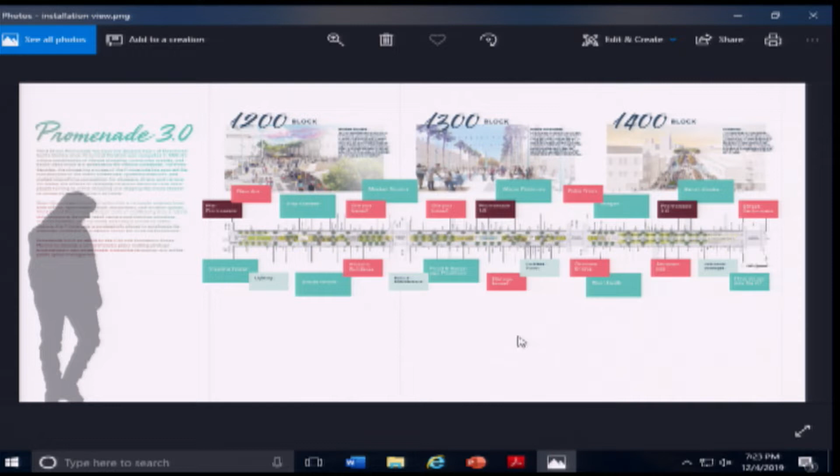I also want to share the latest that we presented to City Council. As I mentioned, on November 5th we had a long study session with the City Council on Promenade 3.0. We dived into all three lanes of activities. As the commission will recall, we've divided our work on Promenade into three lanes. Lane 1 deals with management of the public space and the role DTSM plays in choreographing and curating events on the promenade. Lane 2 deals with some of the regulatory, mostly land use regulations on the promenade.

And you'll recall, before November, in October, you had a study session about a potential IZO related to promenade fronting properties, so we're still working on that. That's lane 2. Lane 3 is the actual physical plan for the public infrastructure of the street. So the presentation I have tonight is just on the physical plan, because that's new material we presented to council that you haven't seen.

Council's reaction on all three lanes was very positive. They said, go forth and be bold. They really didn't pull back on any of the suggestions we made, which in the case of the physical plan, you'll see results in a pretty significant transformation of the street.

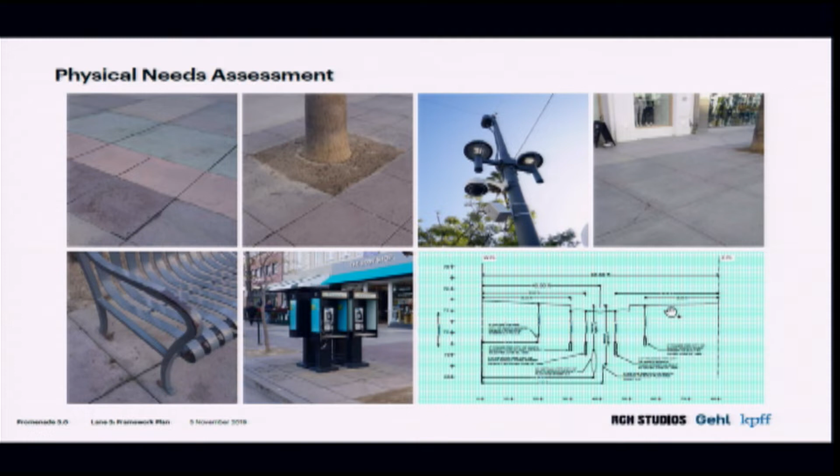I'm not going to go through a lot of this preamble material, it's the same presentation we gave the City Council. So you recall there's a project vision, and there are 7 project goals that flow out of that. You'll recall we started this process a year ago with a physical assessment of the street, counting every crack in the sidewalk and mismatched pavers, and there's still phone booths out there. There's some pipes under the street that probably need to be repaired.

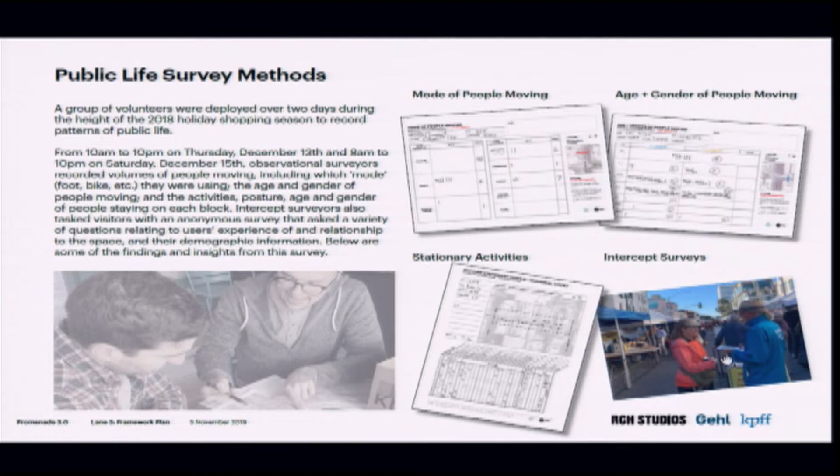We did the pretty extensive public life survey. We spent 2 full days last December, almost a year ago this week, surveying people through interviews and also just recording their behavior as they stood on the street or walked by. We came away with a series of pretty interesting insights. We did a study session in March, I believe, with you, where we reviewed all that material.

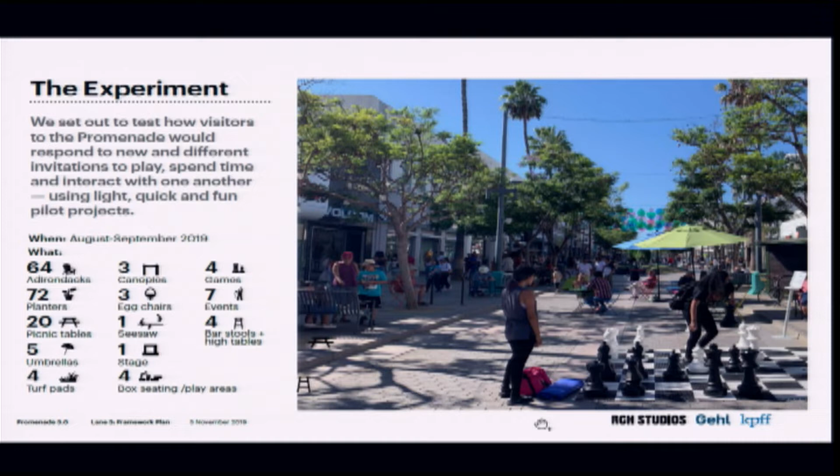There were 5 insights that we thought we could test through summer pilot projects, and I hope you had a chance in August and September to walk the promenade and see some of the activities we put out on the street. There's just an inventory of chairs and a stage, etc., that was put out on the street that we called the experiment, and the response on this was overwhelmingly positive.

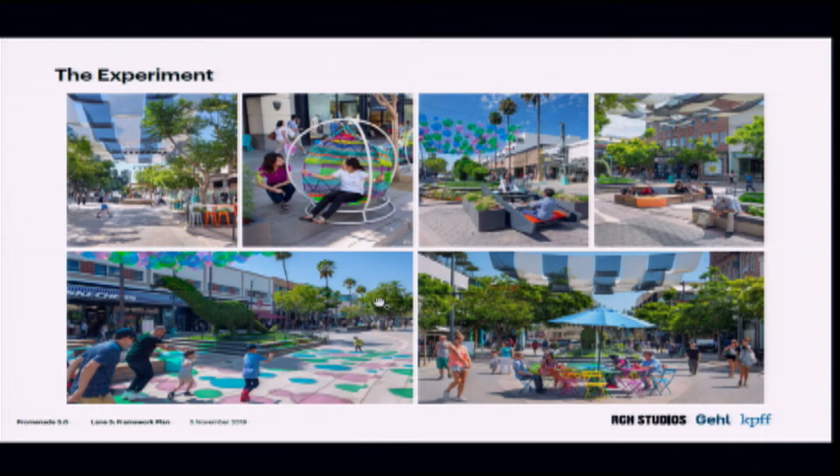Some of the takeaways: we increased, based on another survey we did in September, where we repeated the same public life survey. We increased the number of women and children as an overall percentage of people spending time on the promenade, particularly in that center play space. So that's a good trend direction.

Businesses reported an increase in foot traffic and in some cases sales during the time frame of the experiment, and we don't think there was any other significant factor, like no new major stores opened in that time frame, that would explain increased foot traffic other than the new amenities we put out onto the street.

This one, I think anyone who's studied William Whyte isn't surprised by at all: when you almost triple the number of public seats available on the promenade, you see a huge increase in the number of people actually sitting and using it. Last December there were only 90 public seats, and less than 1 in 100 people recorded walking up and down the promenade actually sat down. With almost 250 seats, 1 in 11 people were recorded sitting down.

The seats are all movable, and the funny anecdotal takeaway is that we'd arrange the colorful Adirondack chairs in the same pattern every morning - the downtown ambassadors would do that - and on the 1400 block, by the end of the day, most of them had migrated to be in front of the Apple store as a kind of outdoor waiting room. So movable furniture was a big hit, letting people create their own social spaces. The ultimate design relies heavily on movable furniture, as you'll see.

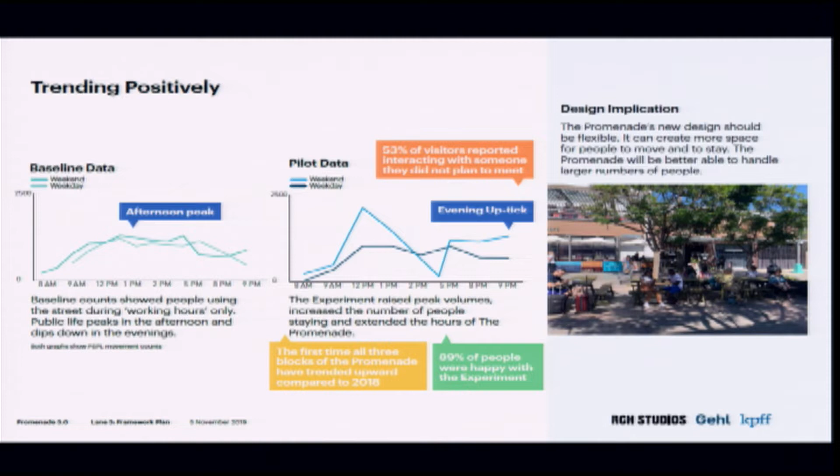But another interesting fact we learned: we thought we wanted a stage at the end of the street - the far north end being the attraction to bring people to walk all 3 blocks. Even though programming on that stage was relatively light, we got some noise complaints from people who live in the neighborhoods north of Wilshire about activities occurring there. So as we worked through the design, we realized the primary stage probably needed to be in the 1300 block. This is a case of designing, testing, and learning as we did this experiment over the summer.

Here's an event we did on the stage. We were on KCRW - Frances Anderton spent some time with us.

We did a number of workshops with property owners and focus groups, to establish guardrails - as long as we had a design that lived within certain parameters, they'd be willing to support it. If we wandered outside those guardrails, they'd be challenged in their ability to support the project. So that's really what we were trying to get from the property owners.

That informed the direction we took across 3 scenarios. Our design team at Rios Clementi Hale Studios and KPFF Engineering identified 3 approaches: improve, adapt, and transform. Think of these as small, medium, and large in terms of impact to the street - the amount of change it would see, and of course the price tag. Improve is somewhere in the $10 to $20 million range, whereas the full transformation pushes over $50 million.

In the end, after talking to property owners, they told us they'd really like to see what the full transformation would look like and what it would accomplish for them.

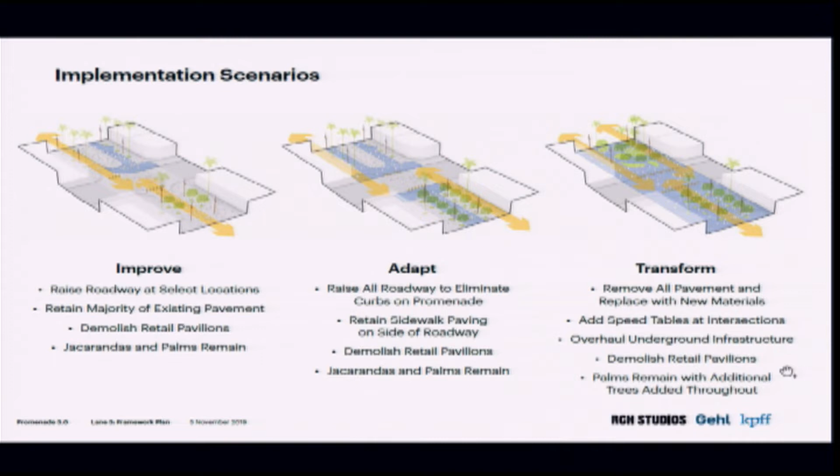So all of that added up to property owners thinking that they really wanted to entertain the transformation scenario. And so, as I said, that was the direction we gave to RIOS to pursue. So I'll walk you quickly through the core ideas of the RIOS design.

There's this basic diagram. You can see the three blocks. So Wilshire is over here on the left, Broadway and Santa Monica Place is on the right. They've given the three different blocks these different programmatic identities, as you can read there. The colors will correspond as we move through to different kinds of program experiences.

So each one of the blocks has a space, and in some cases maybe two, where we can do different kinds of events. These are either built-in stages or spaces that can be utilized as stages for different kinds of program events.

One of the things that DTSM in particular would like to see is one of these event spaces, probably the one at the 1300 block, be basically plug and play, ready to go. So if you've been out there for a major event, you see wires and generators all over the place to run the speakers and the lighting. So part of the underground infrastructure would also include providing all that event infrastructure pre-wired into one of these event spaces, probably in the 1300 block.

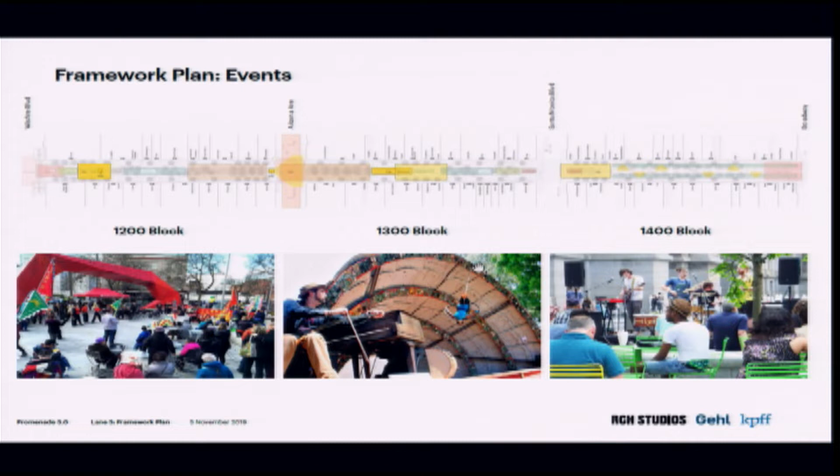One of the ideas we were testing over the summer was what we called social eddies. This is the idea that there are spaces on the street that allow you to get out of the flow of pedestrians. There are days when there are so many people moving up and down the promenade that it's actually hard to stop, you sort of feel like a salmon in a river. So we were testing the idea that maybe we could create spaces that were smaller, intimate, where people could stop and sit in the middle of the street, get out of the flow, and just enjoy the theater of the street itself.

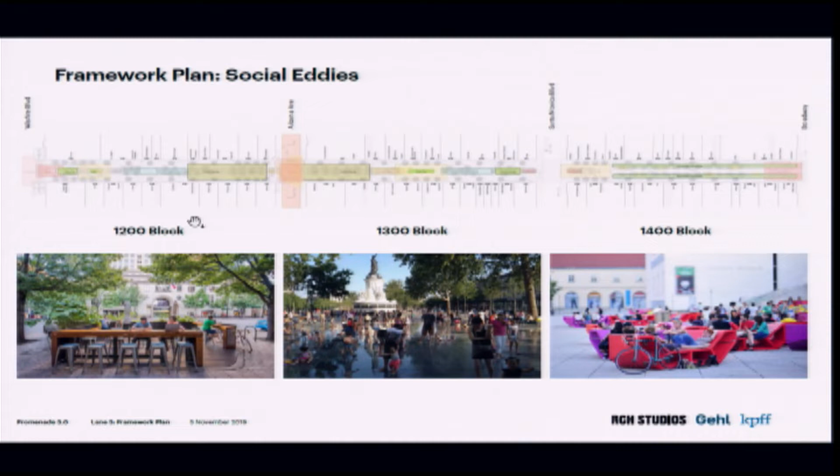There are various places designed in the plan for these kinds of experiences. One of the big ideas is to consolidate the farmers market at Arizona and 3rd. We'd lean into the fact that we close Arizona for the farmers market, but what we're designing for and proposing is that the portion of the farmers market that closes 2nd Street would actually move up onto the promenade itself. You can see trailing north and south from Arizona, we're providing market space, and you'll see how that looks in the detailed plans momentarily.

This is both the Wednesday and Saturday farmers market, but we're also imagining this could be any kind of market that utilizes this standard 10 by 10 tent, and in some cases maybe a smaller market that doesn't need to close Arizona. That could be a monthly used book fair, pet adoption, a flower market, particularly with the holiday season, a Christmas market or holiday market, craft market would be very appealing. So there's lots of different ideas for that. It could also be other kinds of community festivals, like a Korean food festival or different Korean food vendors that utilize the tents to do a food festival of some kind.

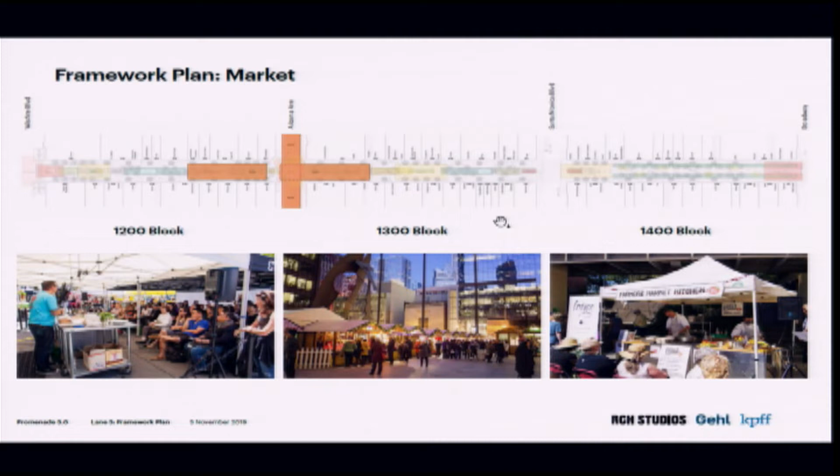We're also identifying locations where significant public art could be located, and they're generally falling, as you can see, at the intersections of the east-west boulevards. These could be new elements. We have some ideas for what kind of new elements we'd like to see, but obviously this is where the Arts Commission and other folks in the arts community would need to weigh in.

These could also be locations for the current dinosaur fountains and sculptures. The design you'll see does not include the dinosaurs in their current location. We proposed, we told Rios, do not feel encumbered by those, and they did not when they drew up plans. But these locations for public art are possible places we could relocate some of the dinosaurs if that was a kind of community desire.

One of the ideas we're proposing at the very north end of the street at Wilshire is that we would build some sort of observation tower that would reach up, on the order of 50, 60 feet. We've joked that it would be 66 feet tall since we're at the end of Route 66. We don't have a design for that, it's just kind of an idea. I think this is probably a place that would be a great opportunity for a public design competition. But it serves a number of purposes in terms of creating a visual icon to draw you to the end of the street, and then allow you to stand up, look back down the street, get your photo opportunity, but also be able to look down Wilshire out to the ocean, so you get the experience of being adjacent to the ocean.

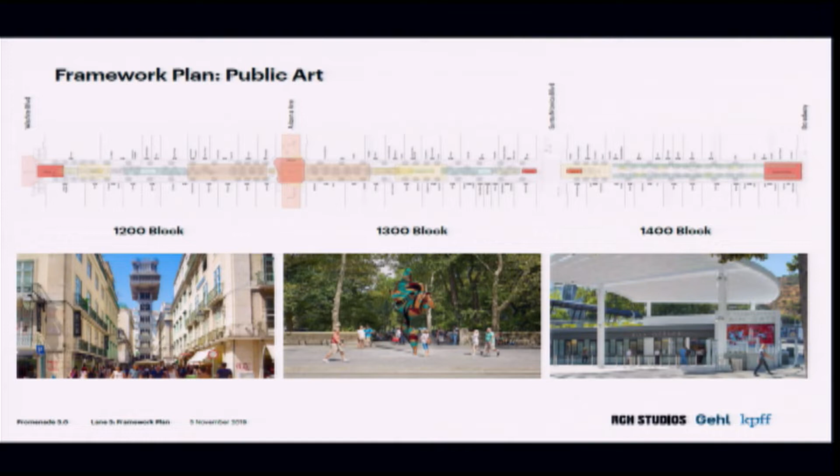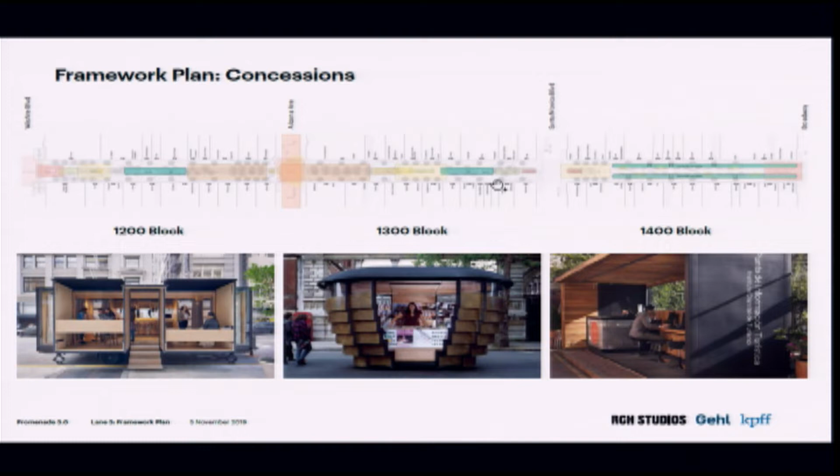And then we would also have a number of places for retail concessions. So we completely reimagined the CART program and the two retail pavilions that sit in the street today. They'd be done in a different format and different ways on the 3 blocks.

Put all this together, you get this kind of diagram, and then this is the plan view that Rios has drawn up, and I will show you these pink cones indicating 3 perspectives they've drawn. I will show you those 3 perspectives and the corresponding plan view, and then entertain your feedback and discussion. We have the full plan drawn up that we could go through tonight, or you could come to the open house and exhibit we'll have on the wall, fairly large, I think it's almost like 9 feet long when we plotted it out.

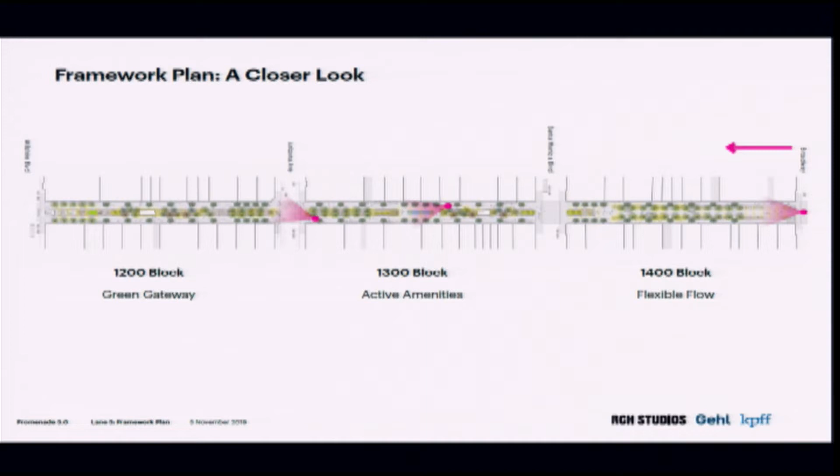So let me jump to this perspective. This is the view from Santa Monica Place looking north.

So in this particular configuration on this block, we basically have the one that's most similar to the street as it's configured today, wherein there are going to be, we propose, the existing palm trees, fairly significant new shade trees, with the primary flow of pedestrians and service vehicles running down the center of the street, and then amenity and program spaces flanking on the side.

And then these would be a set of shade canopies of some kind, and a sort of landscape and fountain zone serving as the gateway to the street from the promenade. So this is what you're seeing from the plan view.

And then these zones here under the shade trees would be for movable furniture, potentially retail kiosks. It'd be a great place for the buskers and street performers to set up and take over a space between two of the trees, and kind of utilize that for performance.

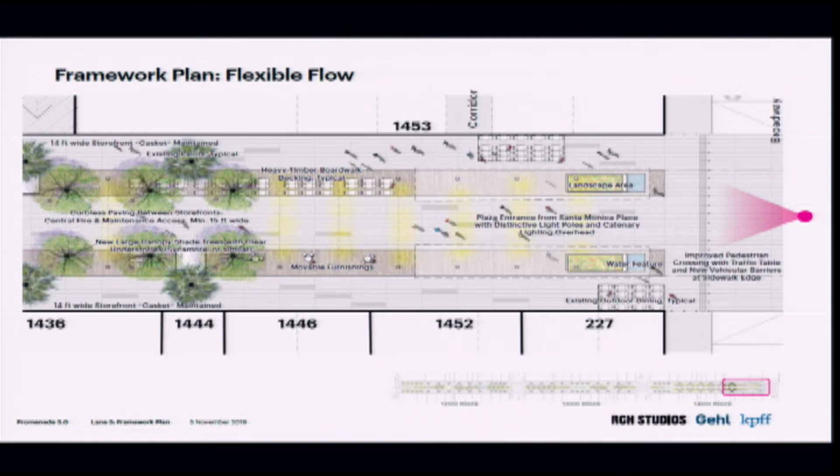What we're showing here underneath the trees is a proposal to do a heavy timber boardwalk. So this would be evocative of the pier or the beachside boardwalks, to evoke that sort of beachside experience, and also to mitigate the heat island effect that we have with all the concrete and granite that the street has today.

When we get to the middle of the 1300 block, what we're proposing in the plan view is that the street configuration changes. So on the 1300 block and the 1400 block, the boardwalk material goes to the center of the street, and between the existing palm trees to the edge of that boardwalk, we maintain that 14-foot clearance that we need for service vehicles and most pedestrians. Then this becomes the primary pedestrian flow on both sides of the street.

These are the existing palm trees, and this was important to property owners. Many of them utilize the space between the facade and the center line of the palm trees for outdoor dining, so that's maintained on all three blocks.

But what we're trying to do here is by creating the boardwalk space down the center, this becomes space that we can utilize for different kinds of programs. Pedestrians are now, in a way, forced to walk closer to the storefronts in this configuration. So we would imagine here in the 1300 block, there's a built-in stage.

So the boardwalk lifts up to be roughly 30 inches or so high, creating a kind of stage setup. Then there's a plaza here. This would be a fountain.

This is one of those kind of jet fountains that Rios has just completed at the Music Center in downtown LA. So you have the jet fountain, so kids are playing in it when the fountain is on, but you could turn the fountain off. It dries out really quickly. It's essentially a flat surface. You could set up a bunch of chairs there for an event or a concert.

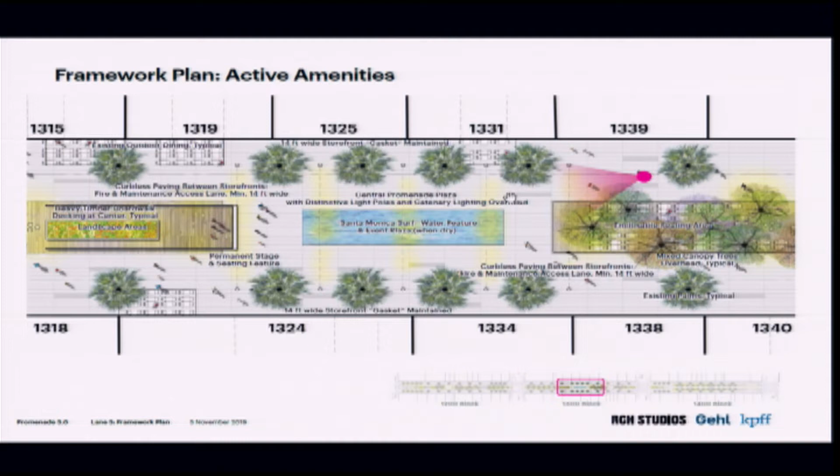And DTSM's office is just out of frame here as well, and they currently use their office as the green room, so they're very convenient to this particular location. This is where the center dinosaurs are, where we did the balloons and beach ball effect this summer. So a notion of what this space might look like. All the lighting and electronics, et cetera, you would need for an event at the stage, which would be right over here, is all pre-wired into the light fixtures and overhead catenaries.

And then the last intersection, or last place that Rios rendered, is the intersection at Arizona, where we have the farmers market space. So again, we have the same configuration with the sort of boardwalk material. This would be roughly 25 feet wide. And then here, the trees land every 25 or 30 feet on center. So in between these trees, in this box here, you could put in 4 of those 10 by 10 tents.

So you can imagine the farmers market on Arizona, then you loop down and you can do the full loop around. Or if it's a market that doesn't close Arizona, you just loop through the promenade itself.

We're proposing at Arizona, and in fact at all the intersections, to do a speed table at the street. Since we've moved to a curbless street in this scheme, the entire surface of the promenade is now at sidewalk level. So the proposal is to do a speed table at all intersections, so pedestrians continue walking at sidewalk level while cars bump up into the zone of the pedestrians.

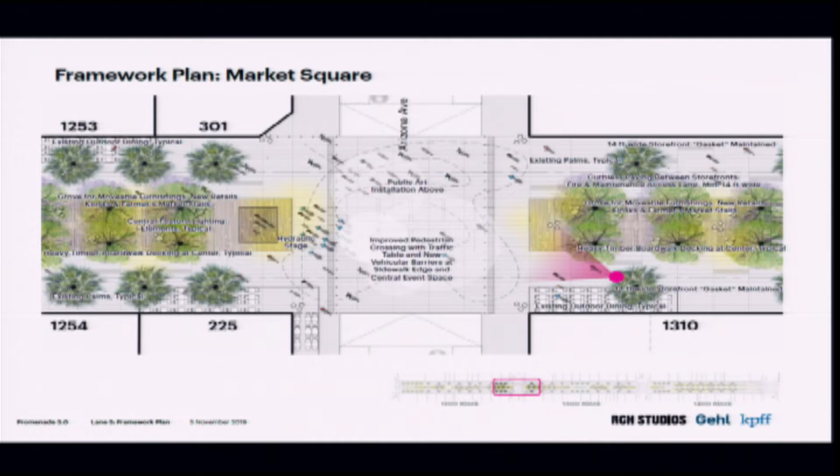At the Market Square area, we're proposing a hydraulic stage that would be level with the ground when not in use. If we wanted a stage, or to put the Christmas tree there, it would lift out of the ground. In the rendering, you could imagine a bluegrass band or jazz band performing on a market day, and when the stage isn't needed it drops back down. When there's no market in that space, there'd just be movable chairs and furniture under the trees, creating a nice tree canopy for casual interaction and socialization.

We also think this intersection would be a fantastic place for a really significant piece of public art. There are a number of artists who work with aerial hanging structures, and this wispy purple form hanging in the sky could be that kind of aerial canvas or artwork. It would hang over the intersection and indicate that Arizona and 3rd Street is a significant market square, in a way the main square of downtown Santa Monica.

This scheme also anticipates and can adapt to any number of the different closure options that have been discussed for Arizona over the past year or two. Whether that's a full closure of Arizona, a partial closure, or only a closure between the alleys, this scheme leans into that and would accommodate it very well.

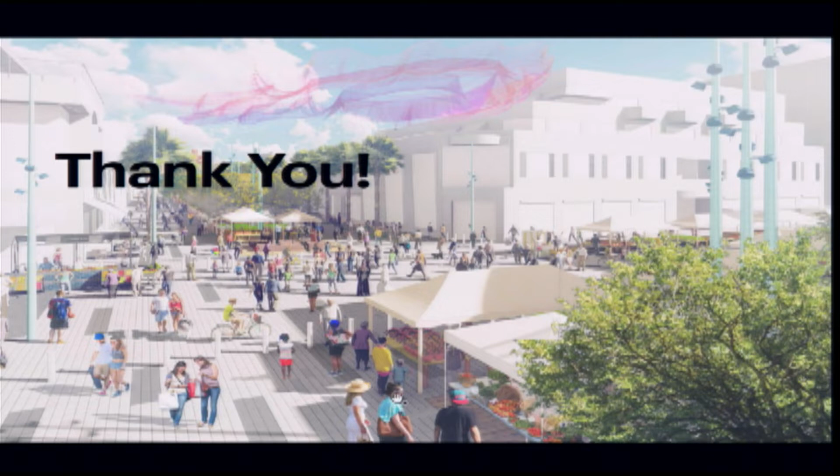We had proposed a set of policy questions on all three lanes to the city council. They were affirmative and said to go forth on all three with these questions and all three policies, so the council endorsed the idea that we would pursue this particular plan for the promenade. They were open to all the ideas we proposed. With that, we decided we would set up at the farmers market or the event at the promenade coming up on Saturday, and start talking to lots of different groups to get feedback.

I presented this same presentation to the Arts Commission. We're trying to get on the agenda for the Architecture Review Board before the year is out, but it depends on their workload, and we'll probably visit a number of other commissions in January. We anticipate taking all that feedback, refining the design, and ultimately bringing this back to City Council at the end of March, which is our current time frame.

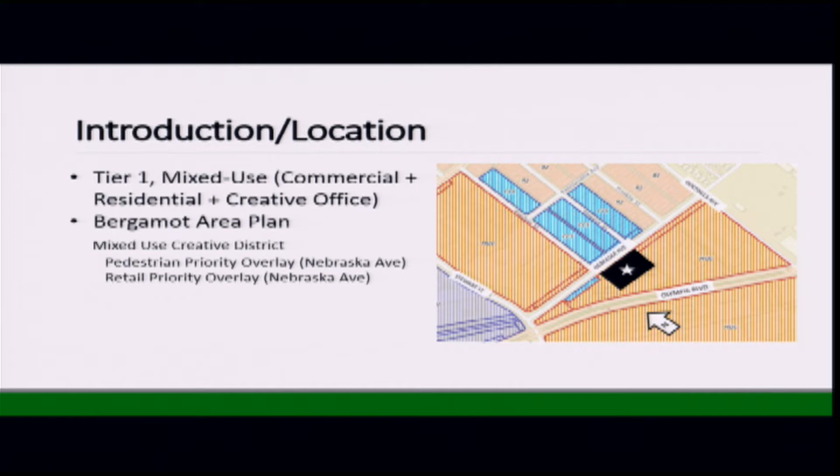The project is 4 stories, 30 feet in height. The parcel size is 74,250 square feet. The floor area for the project is 1.43 FAR. On this page, you'll see the breakdown of the 183 residential units.

The ground floor includes about 8,500 square feet of retail commercial space oriented towards Nebraska pursuant to that overlay. There are 2 below-grade levels referred to in the plans as C1 and C2. These levels are excluded from floor area ratio per the Bergamot area plan. There's approximately 52,000 square feet of creative office and just over 40,000 square feet of residential storage and amenity space. There are 3 levels of subterranean parking below that, accommodating 395 parking spaces, which include 10 car share and carpool spaces, with residential bicycle parking also provided in those garage spaces.

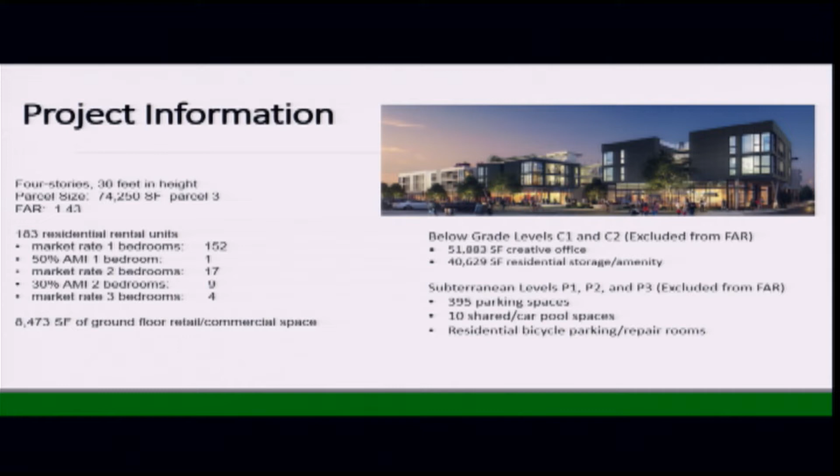Here's a quick overview of the garage plan, level P3, P2, and P1. P1, being closest to grade, also houses several trash rooms which accommodate trash, refuse, and recycling, which would then have the bins transferred to grade where there would be a staging area to allow for servicing and pickup.

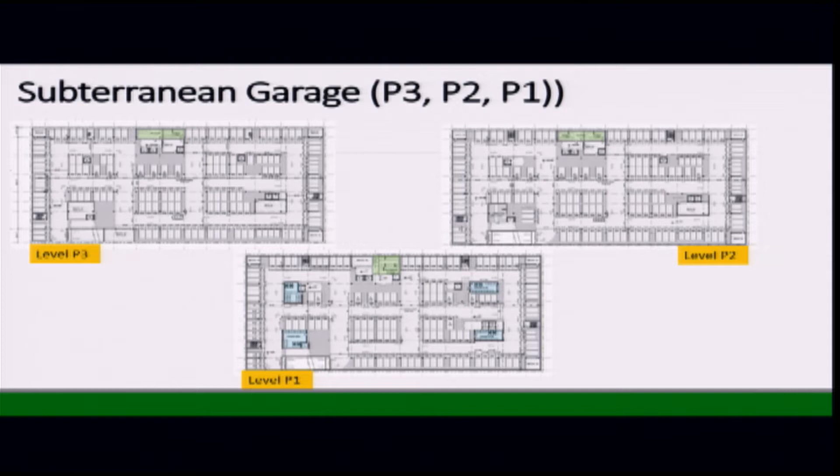Above those 3 levels of subterranean parking, there is a reference to level C2. This is the below grade level that accommodates some creative office space as well as some residential amenity and storage areas. As you can see, it's arranged around a central courtyard configuration, and they anticipate providing some landscaping and seating opportunities. This courtyard would be privatized and not necessarily available for the public to access.

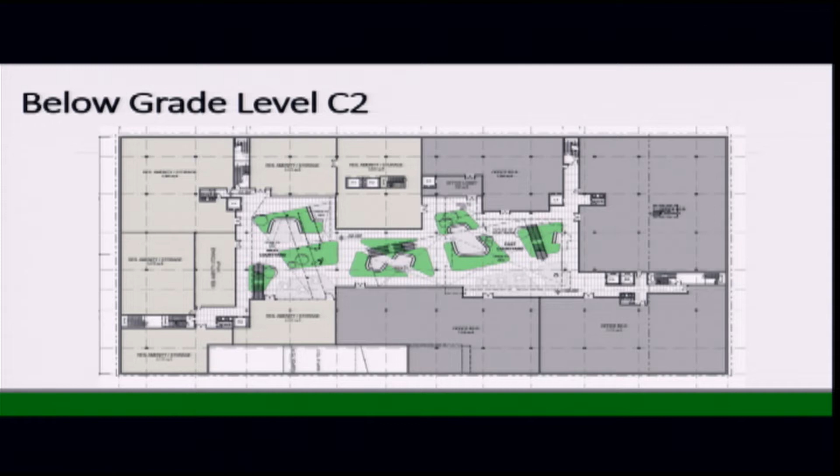And above that, at C level, level C1, which can overlook into the courtyard, is also a split of residential amenity space and creative office space.

To give you a more 3-dimensional look at this arrangement, if you were to take the building and slice it like a cake, this is a cross-section view. I've labeled P3 at the bottom level, then P2, P1. C2 is where the courtyard space is, and C1 overlooks into C2, but all of these levels are below grade, with this being the ground plane along Nebraska Avenue.

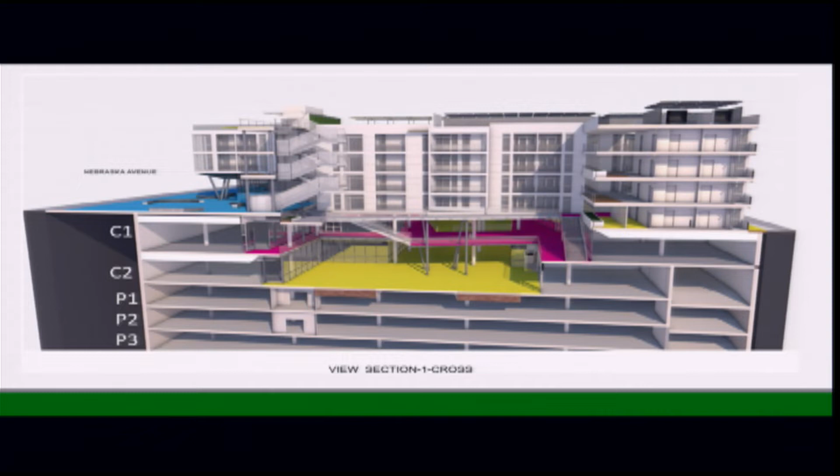So let's move up above grade now. Oh, I'm sorry, I'm going to add a few images.

Okay, so now moving to grade. This is the site plan of the ground floor, with Nebraska at the top of the page. The red outlines the property line for the large site. This is the pedestrian priority overlay as well as the retail overlay.

The areas highlighted in gray are the retail spaces. They are required to have a depth of at least 40 feet, which they comply with, and to have active spaces along that frontage. The project's primary public open space is oriented towards Nebraska Avenue with this large plaza area that funnels you in towards the primary access into the lower levels.

There are some ground floor units, approximately 30 or so at this level. 2 of the affordable units are at grade. The project is not required to provide for any street enhancements.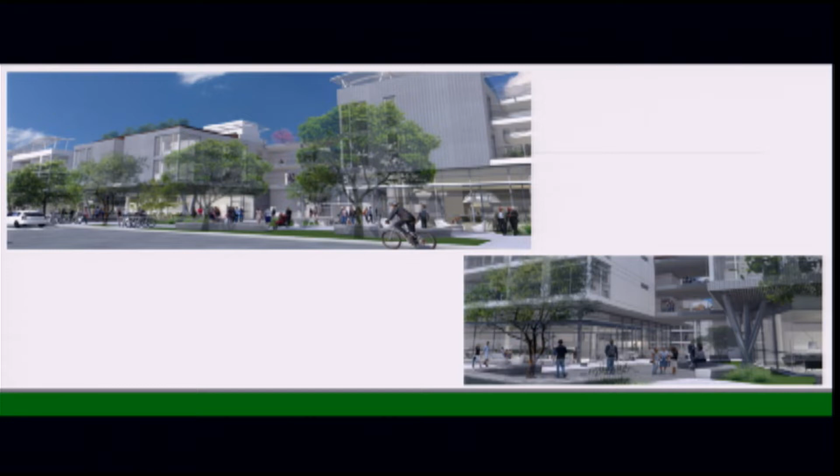So the upper levels, the formats are pretty similar. For this particular level, because the ground floor heights of the commercial spaces are 18 feet of clearance, this floor is sort of the intermediate floor, as you wouldn't be able to put units here because it has to have the 18-foot clearance. There are 2 affordable units being provided on this level as well.

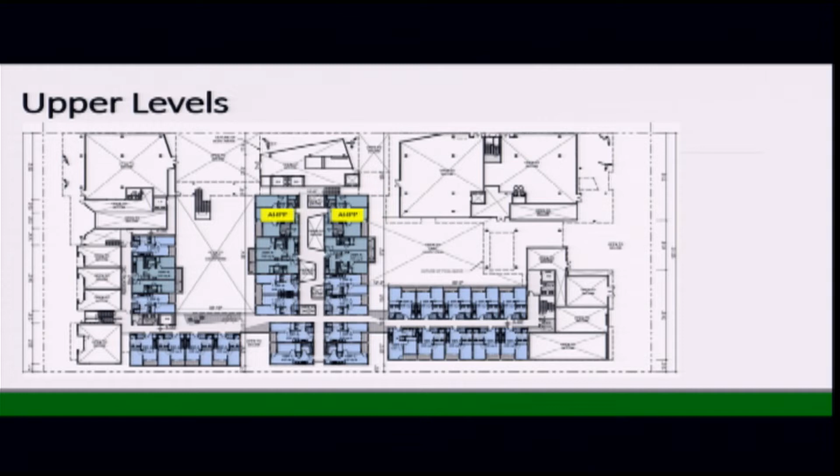Moving upward, this is the 3rd level. There are 2 affordable units identified on the plan, as well as a residential amenity. There's a pool located on the east courtyard.

This is the 4th floor, allowing for 2 more additional 2-bedroom units.

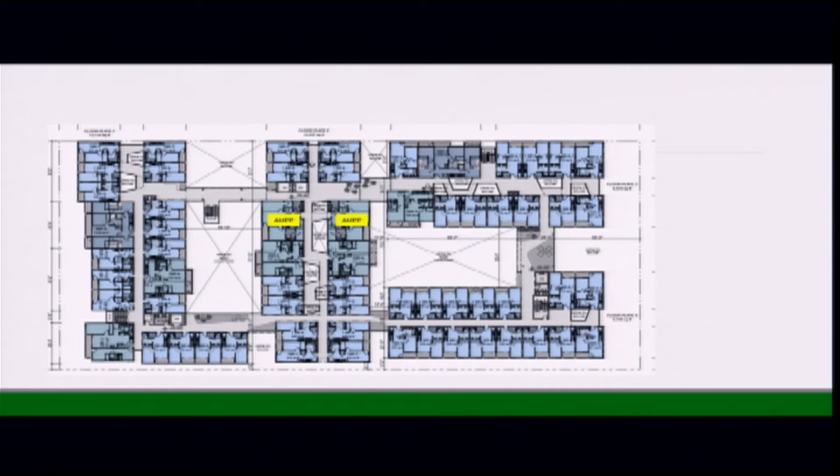And then for the roof, the project is designed to meet the solar requirements of the Bergamot area plan, so the grid pattern you see is for the photovoltaic panels. The other areas have been addressed to provide residential amenities—there's a lounge area, places to cook, a yoga deck. They're also looking to put a cinema lawn on the roof, and to provide some rooftop garden areas.

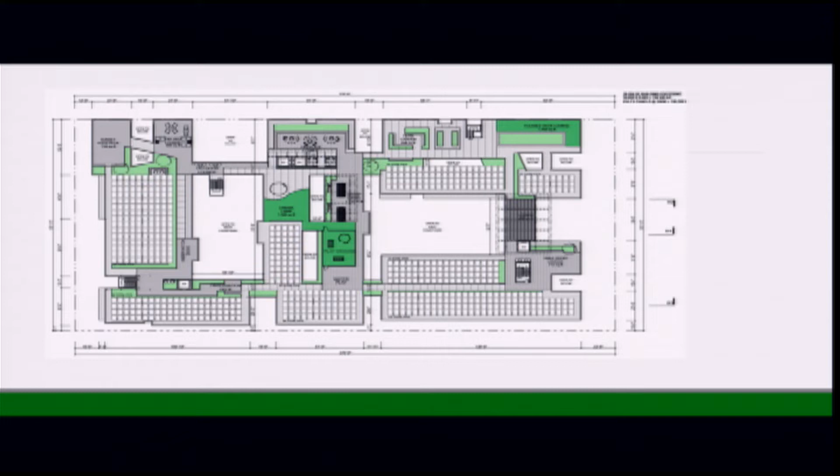So how might those open spaces feel? There's such a variety of them. There are ones the public can access from Nebraska, some private space in the lower courtyards below grade, roof deck amenities, even a playground, and opportunities for rooftop gardening. So the project does integrate a variety of open space, and it complies with the minimum amount of open space and public open space as designed for the project.

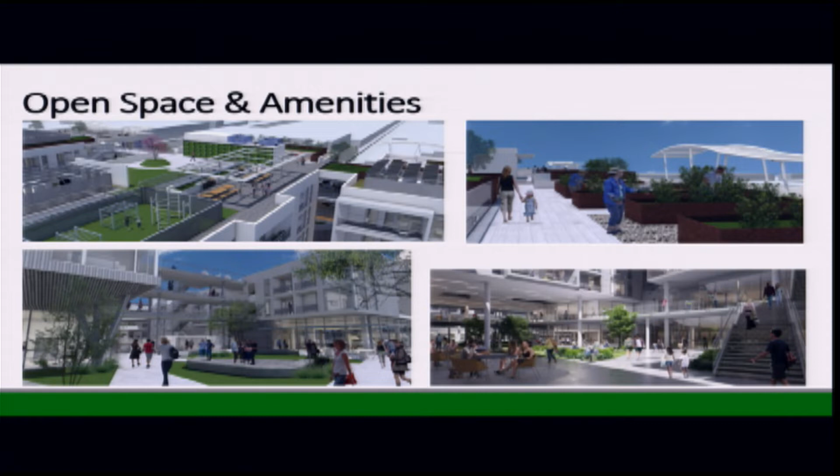The project went to preliminary design review before the Architectural Review Board back in May of 2018. There were several comments related to the project site design, mass and scale, and open space. The project has been revised since then, but on the top half, the images show what the board had seen: only one primary open space with the massing relief at the center, and the building footprint had less congregation of open space open to the sky—more like slivers, a 3 or E shape, were the areas open to the sky. The applicant really looked to revise the site plan to consolidate larger, more meaningful open areas.

Below is the revised building footprint, and also a revised rendering showing how they're trying to address massing strategies through materiality, additional articulation in the facade, and an additional cut for a smaller plaza area to accompany the primary plaza area.

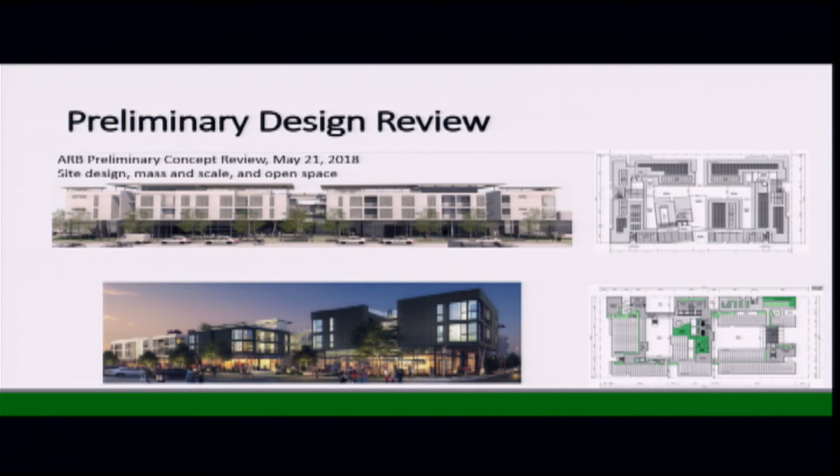Staff has reviewed the project for CEQA compliance, and this project is exempt from the provisions of CEQA, subject to complying with the Transit Priority Project exemption. The attachments are provided in the staff report.

We did do public noticing, mailing of the hearing notices. The notice was posted in the local paper, and there was also on-site posting of the hearing. Staff did receive one email comment pertaining to the CEQA exemption and concerns related to that. I believe you have a copy of that as well.

So in summary, it's a Tier 1 project. The community benefits section does not apply. The project is greater than 15,000 square feet, so it is subject to the development review permit findings. This project is at least two-thirds residential use, so the Housing Accountability Act applies. The project does satisfy the AHPP requirements with two 1-bedroom units deed restricted to 30% income households, and the developer is voluntarily providing one additional unit, a 1-bedroom, restricted to 50% income households. This is a transit priority project with a CEQA exemption.

In conclusion, staff recommends approval of the DR based on the findings and subject to the conditions within the draft revised or redlined statement of official action. Below, I've provided highlights of conditions related to ARB and deed restrictions, corporate housing and lodging, case management, and affordable units, with the numbers for your reference. That concludes my presentation.

A neighborhood is an area where people live and interact with one another. Neighborhoods often have fuzzy geographical boundaries, so sometimes it's difficult to tell when one starts and another ends. Major streets often act as logistical boundaries. People usually define a neighborhood by its characteristics.

A neighborhood is defined spatially as a specific geographic area and functionally as a set of social networks. Neighborhoods then are the spatial units in which face-to-face social interactions occur—the personal setting and situations where residents seek to realize common values, socialize youth, and maintain effective social control.

What's possibly contained in a neighborhood? A residential mix of housing units with amenities, community-oriented ground floor neighborhood serving commercial, opportunities for public interaction, both residents, office, and commercial workers, and of course, neighbors, creative office space with support services, public open space as well as private open space, and public transportation. It's a perfect site. It's got all of these kind of characteristics and qualities.

What you see in this image is Nebraska between Stanford and Berkeley Avenue. Think about this as the beginnings of something else which is going to transform this Nebraska over a period of time.

Part of what a neighborhood contains is the potential for a pocket park or plaza space for people to move and operate within that environment.

We purposely separated the buildings so we could get visual access to the interior of the project, both the housing on grade and above grade, and also make visual connections to below grade and allow the neighbors, allow visitors to be welcomed into those spaces. There's two of those spaces along Nebraska and one along Berkeley on the east side of the property.

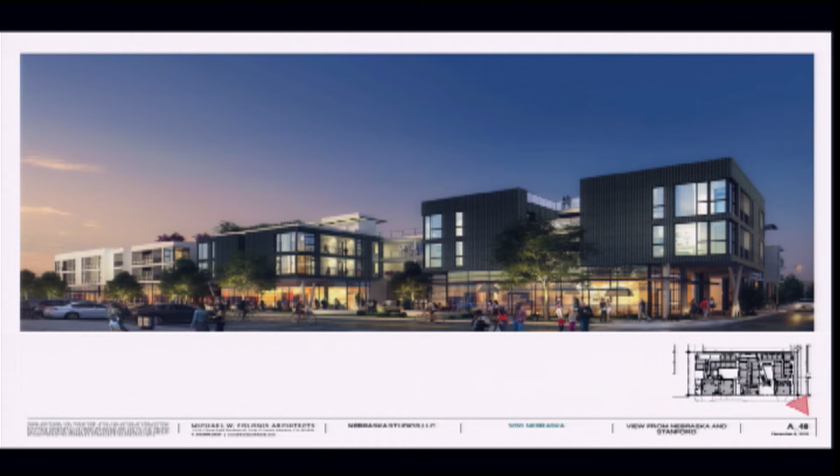So here you see the rendering, and in the lower right-hand corner you can see where that rendering is being seen from. Stanford on the right and Nebraska along the frontage. This is the larger of the two openings where the pocket park would exist.

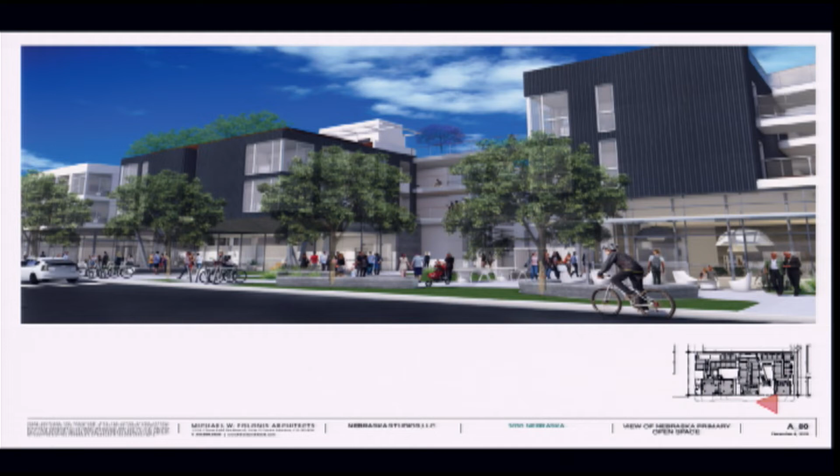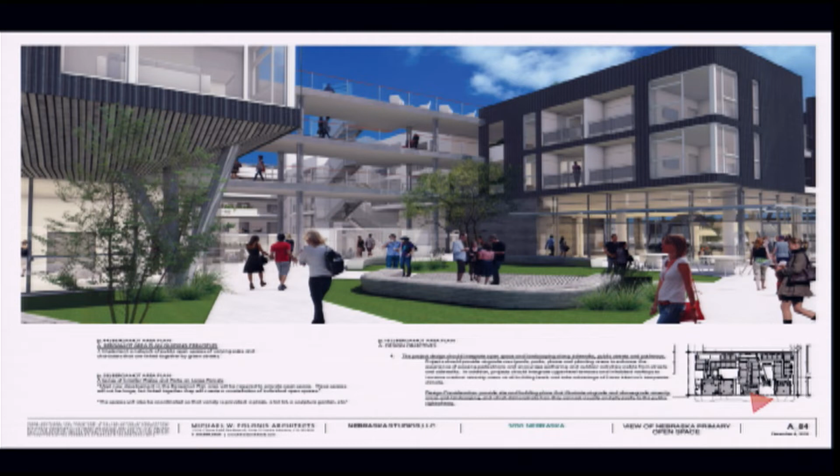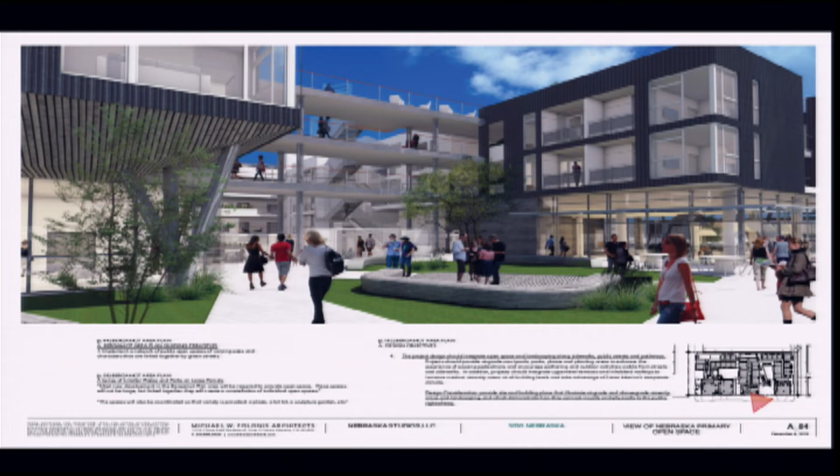As we move a little farther east, you're starting to see the opening in the building and what's potentially visually inviting, both for guests looking for perhaps the deli, perhaps they're looking for someone who works in the creative office space on the C1 or C2 level, or a neighbor who's looking for a friend that lives in the residential portion of the project.

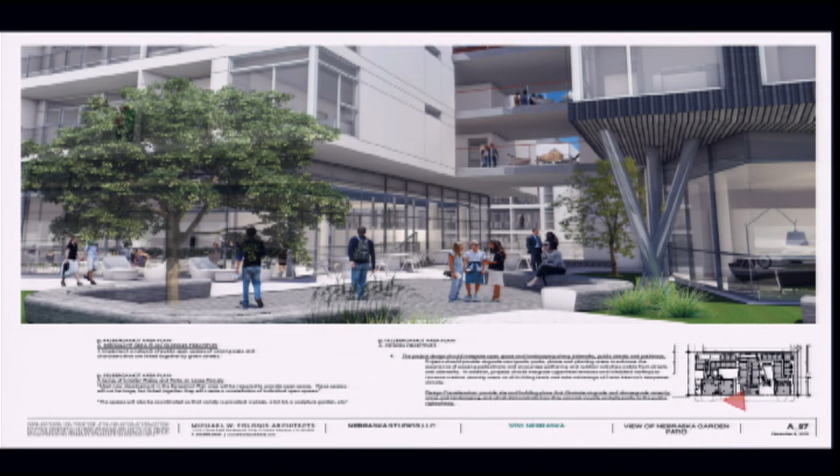And here we are looking a bit east at that same location. This is the secondary opening within the building. The landscaping is important in this area, and opportunities for people to sit, meet, congregate, socialize, and we can imagine perhaps a restaurant or two in this location.

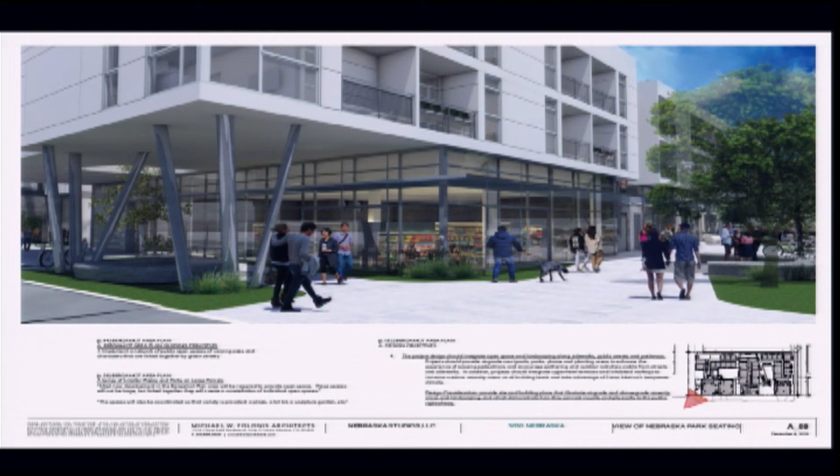The lobby for the rental office, both for the below grade and the above grade, is situated in this area as well. So here we are on the corner of Berkeley and Nebraska. The building, the residential building rises above, which allows a kind of portal into this space to the south as we walk south along Berkeley.

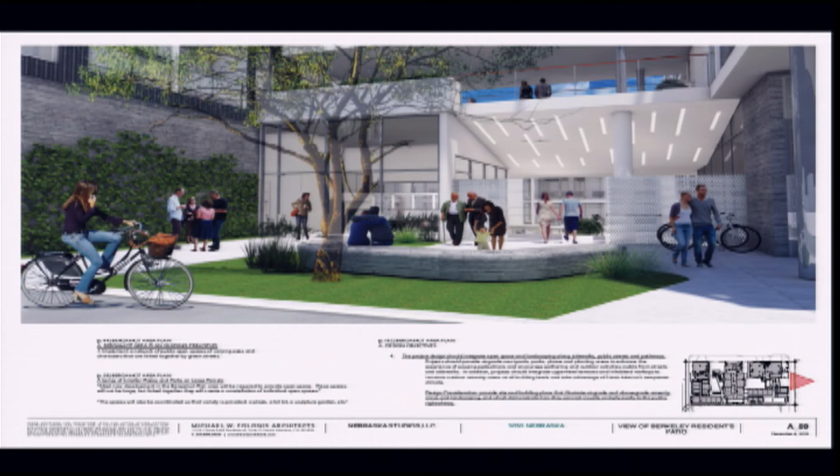Here's the other entry, pedestrian entry into the project at this location, just a bit south of Nebraska. This is looking into that space and what the kind of character and quality of that space might be like.

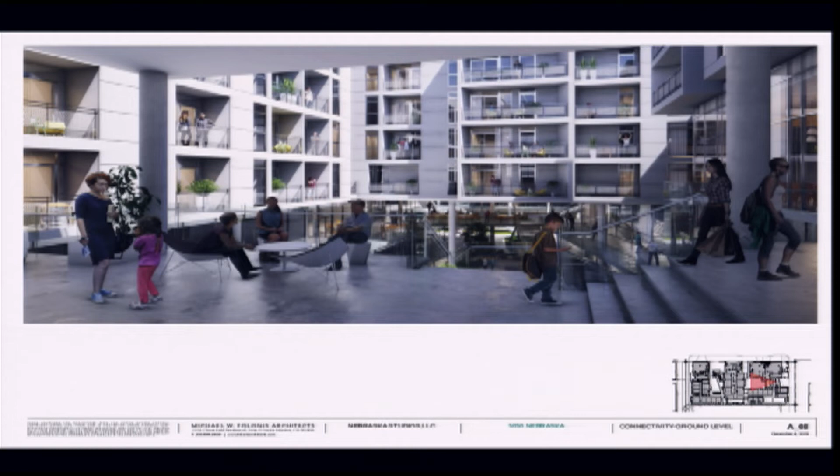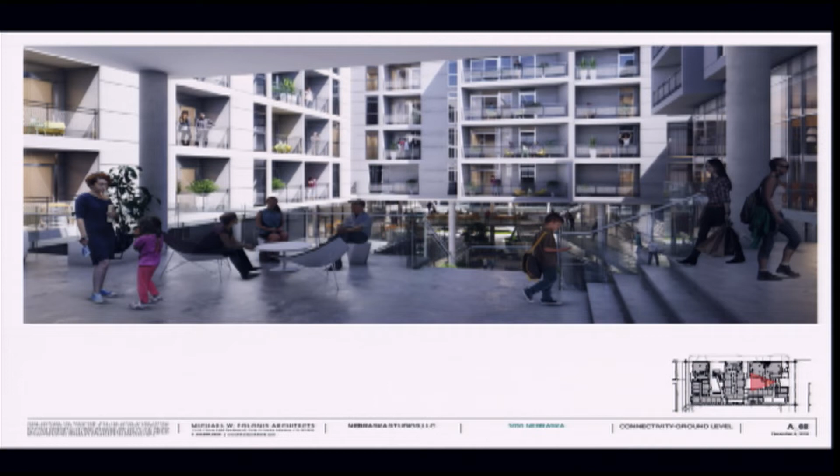So what you're seeing here is the first floor plan, and now we move in from that side entry on Berkeley, and you're on the ground floor plane here. The second level below, and now we're looking into that space below.

We're one level below grade, and I have to admit I've shown these images to a number of individuals, not just in my office but outside the office, and they have a hard time trying to locate themselves. Is this below grade? Is this on grade? Is this two levels below?

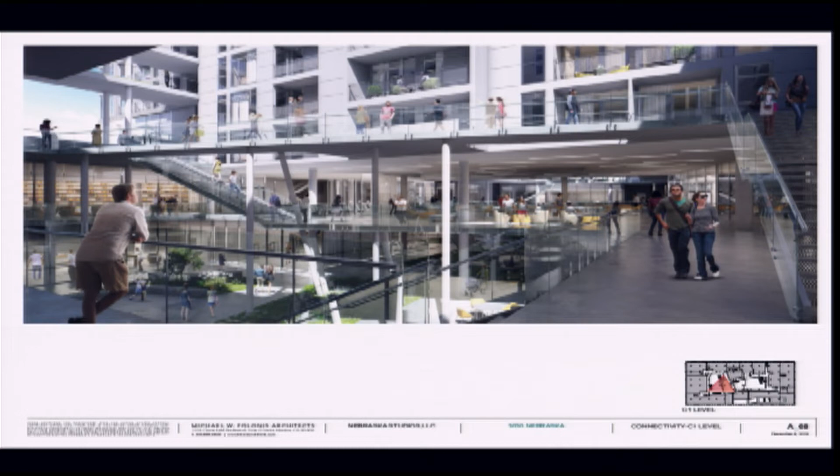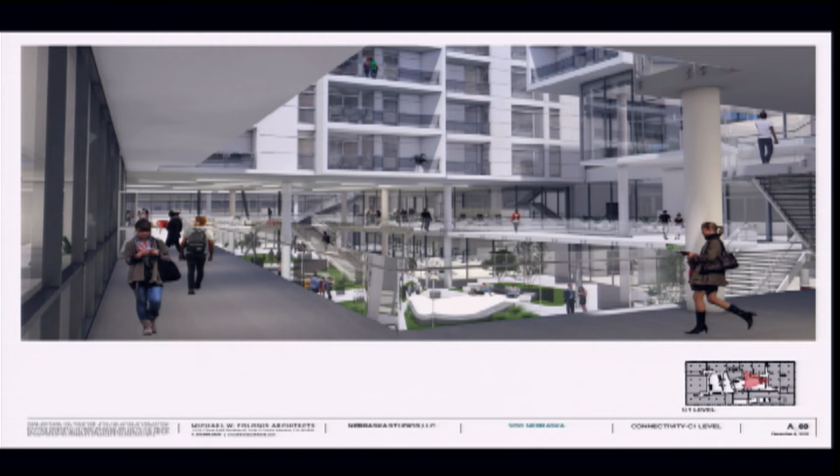Is it above grade? Because I think what we were able to accomplish in this particular scheme was the distances between these residential buildings, which opened up the building for light, ventilation, and visual interest as well. And here we are one level below, the walkways.

And then finally the C2 level, which is looked at as a landscape plaza, both for the residential amenities as well as the creative office space. We work very closely with the landscape architect.

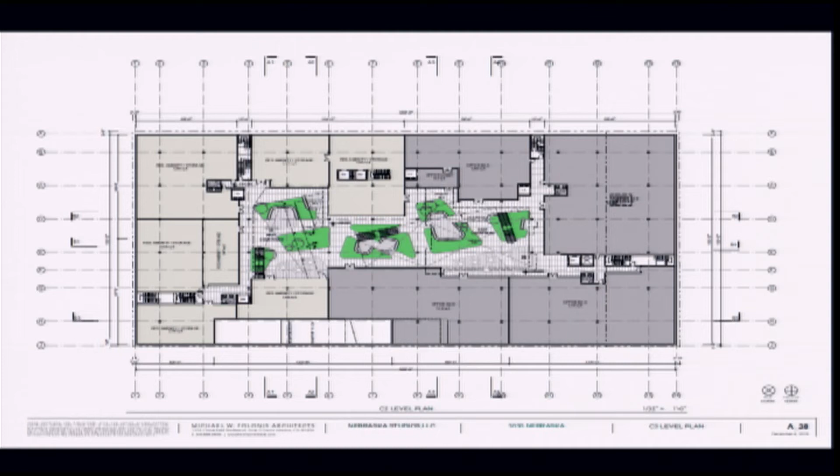In developing, as I said earlier, developing the space along Nebraska, and some of the things that we have thought about in these spaces.

The amenity spaces for residences - now remember, we have two levels, so we don't want to put everything on one level, and kind of split and open it up and split it up a bit. So the possibility of some smaller gyms, perhaps a community room, a large community room on each level, perhaps two smaller community rooms, one each on each level.

Residential storage - we hear a lot of complaints with residences that there isn't enough storage in some of these units, and so sometimes they turn a parking space into storage space. So if the storage spaces were 10 by 10, which are quite small, that constitutes 18,000 square feet of this amenity space. So that could be thought about.

Probably two business centers, a conference room, perhaps a larger conference room on each level, and maybe two smaller ones. Utility and mechanical space - we're looking at what we think we're going to need below grade for utility space. Lounges, a business center, perhaps two screening rooms for private, small private screenings for residences, private meeting rooms, restrooms. So it will fill up quite quickly.

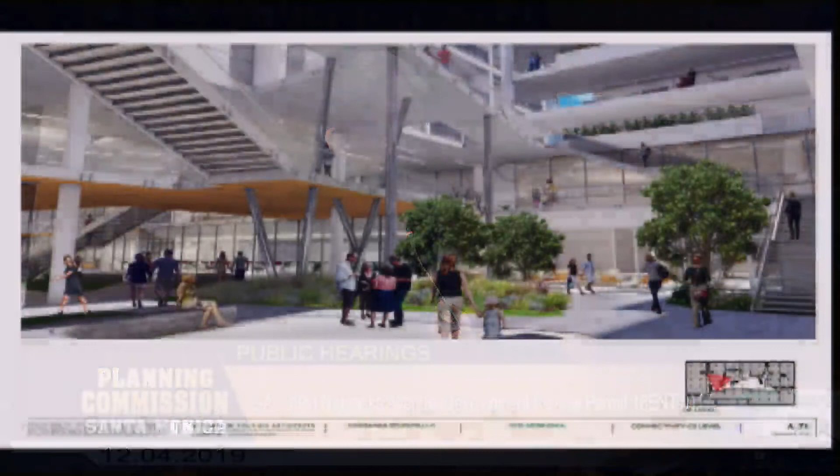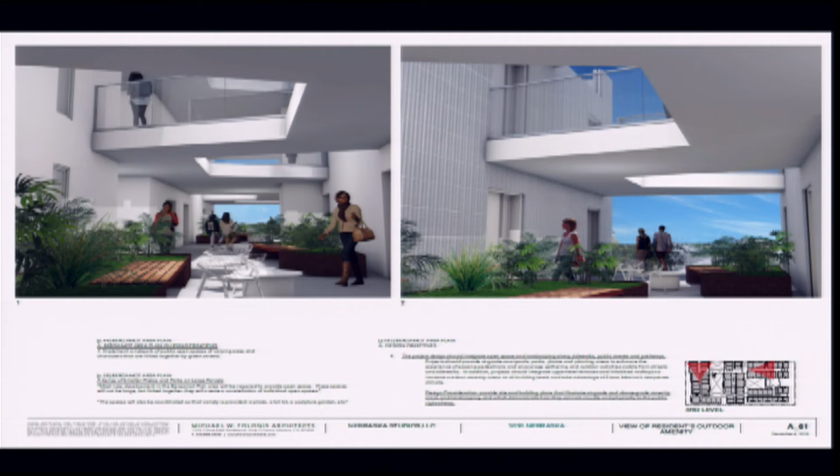Let me talk quickly about another view of the below grade space, the C2 level, and some of the other open spaces and walkways that are open at the various levels, so you can really begin to see that this is quite open to the sky, and a great feeling in terms of that.

In terms of the roof, in a preliminary design sense, we've got a yoga deck, a fire pit lounge, a cinema lounge, a children's play area, some observation decks sprinkled throughout the upper levels, a table sports lounge, small quiet deck spaces, and an herbal garden for residents.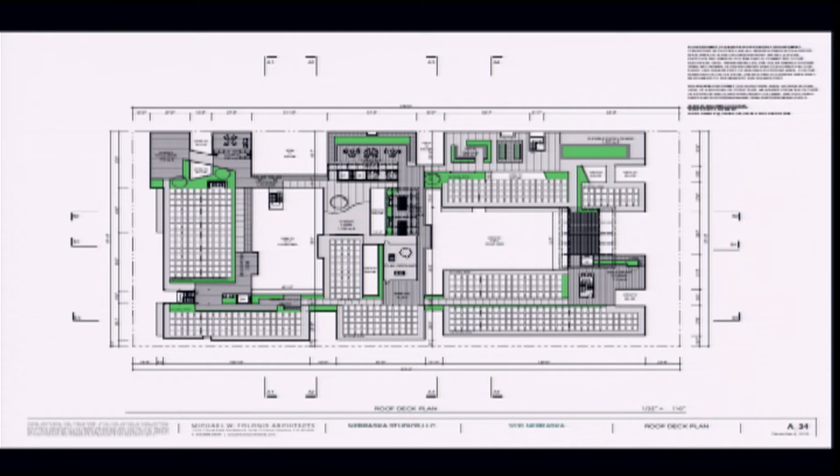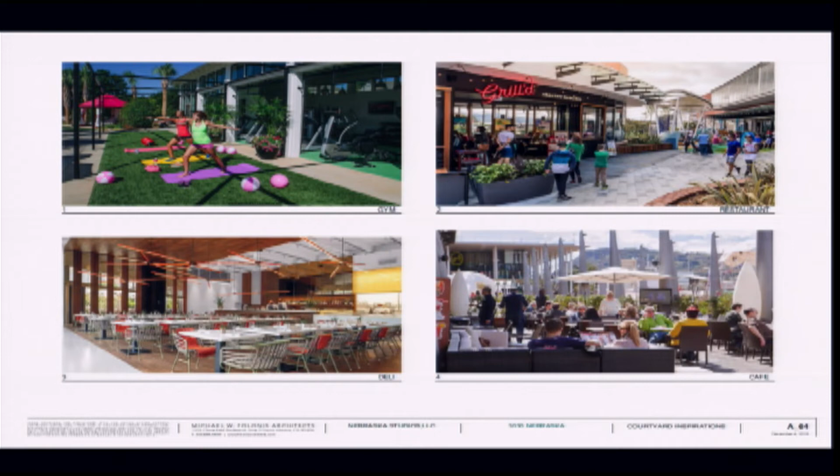What I do have are some images that we might see on the ground floor level, on grade, and maybe above a yoga deck on the roof, and the restaurant in the upper right-hand corner.

What we did, because we thought it was important, was try to compare what we had originally, which is the drawing you see in the upper left-hand corner. That was the original drawing. The total area open to the sky is about 10,900 square feet.

The current plan, in the upper right-hand corner, has opened it up to over 18,700 square feet of open space. So the openness to the sky has grown quite considerably.

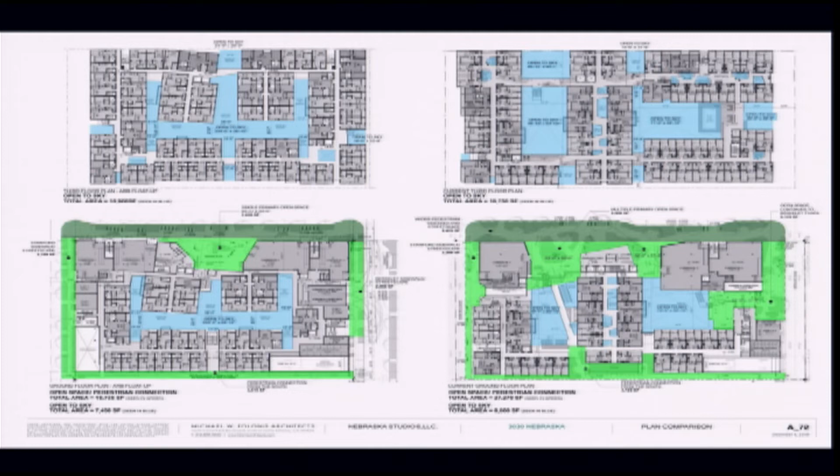Below grade, we've got a total of about 7,500 square feet that's open to the sky, and the new scheme is about 8,600 square feet. So in all conditions, they have grown.

The last point I'd like to make, if I may have a minute or two, is comparing this project's openness against some projects we've already done, one of which is under construction right now—the Millennium East Village, which is in the lower right-hand corner.

That project has a ground floor courtyard about 250 feet in length, averaging anywhere from 9 to 40 feet in width. You can see the 40-foot spot there, which is quite large.

Versus a project on 5th Street, which has a number of spaces you can see in the lower left-hand corner. The number one space that's open is 13 by 22. Number 2 is 14 by 27. Number 3 is 17 by 36. The 4th space is 10 by 30. And the 5th location is 24 by 5.

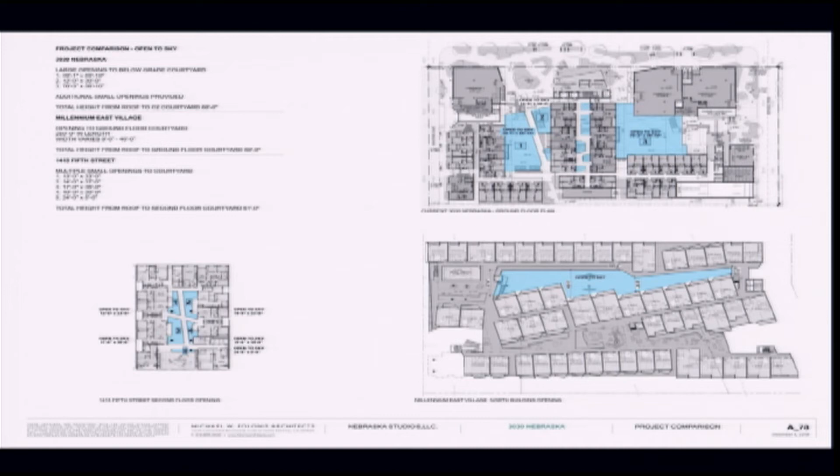So I think in comparison—and these are projects that have come through this commission, one being built and about 3 months from completion, the other having gone through all the entitlement processes—to even think that the below grade space is not going to be friendly, usable, quality space, I think is incorrect. Thank you.

Yeah, I have some clarifying questions. First of all, you've actually entered into the area of naval architecture here. You're building an ocean liner where there's as much above the water line as below the water line. So it's quite an impressive project.

I'm asking about the thickness of the floor planes below grade. There seems to be a great deal of variation. Your first 2 floors have exceptionally thick floors, and then the parking has very thin floors. Is there something going on there that is unique?

No, those floors will probably be somewhere between 14 and 16 inch thick concrete decks. I'm talking about the first 2 lower levels, the ceilings of the first 2 lower levels. They look like they're about 5 feet thick. What's 5 feet thick? I'm looking at page A41. Let me get it.

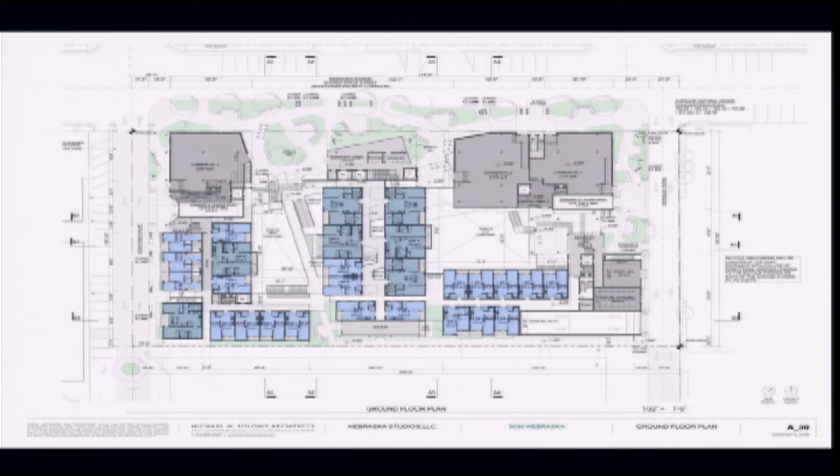I just want to add one last point—it's not like we didn't make some concessions. We've lost units through the process thus far. We reduced units: we started at close to 200, we had 190, we're down to 183. So we've shaved off in order to try and meet the feedback we've received. We started at 200. Yeah, it's just really hard to let go of that.

Once you dig 5 stories underground and pour all that cement, that street's never going to happen. It's just not.

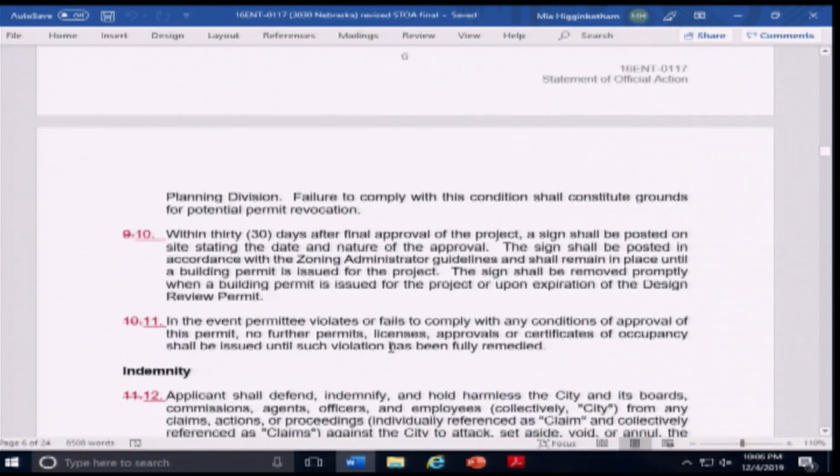We'll scroll down—can we pause on that condition to go back and clarify for the record? For the purposes of AHPP, 9 units are required.

That is correct. For the purposes of the transit CEQA exemption, something else is required, and it's being satisfied by the additional unit, which is very low income. The applicant complied with both the AHPP and CEQA.

What you received in the email was only a portion of that provision. In Section 21155.1, the transit priority project exemption, it actually provides options for how a project could comply. It has to meet one of the following, one of which is providing units—5% of units on site at very low income.

There is another option where an applicant could pay a fee equivalent to that required unit, because the city's ordinance requires that fractional unit—that's how the applicant is getting whole in terms of the 5%. So it was the city's and staff's position, when we reviewed this, that the project was fully compliant with the exemption, with the 9 units and the payment of the 0.15 fractional unit.

The applicant, though, has volunteered this extra unit. So this condition is written such that 9 units is required, and there is a voluntary extra 1-bedroom unit being offered that is not required by the AHPP or the CEQA exemption. This condition is being added to ensure that extra 1-bedroom unit, at very low income

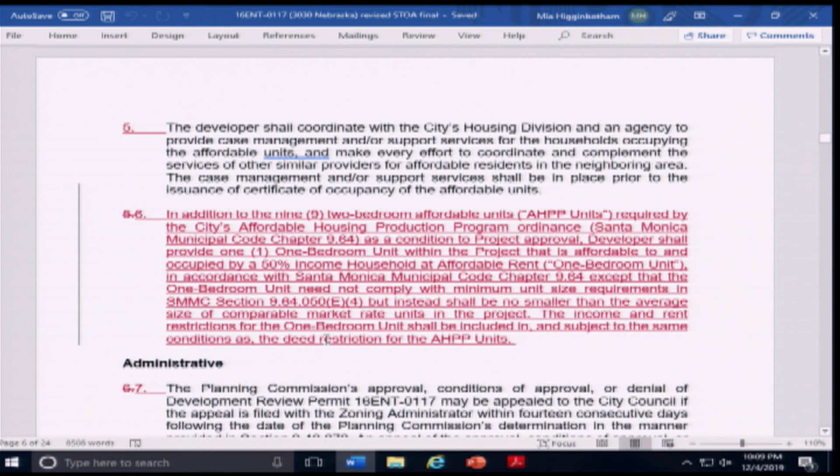Okay, so that's what's in there. Wait, she has other changes.

There's a slight revision to condition number 13 listed here. There's an incorrect date of plans mentioned in the drafted STOA, so the current and most recent version is dated November 25th—corrected there. We also have

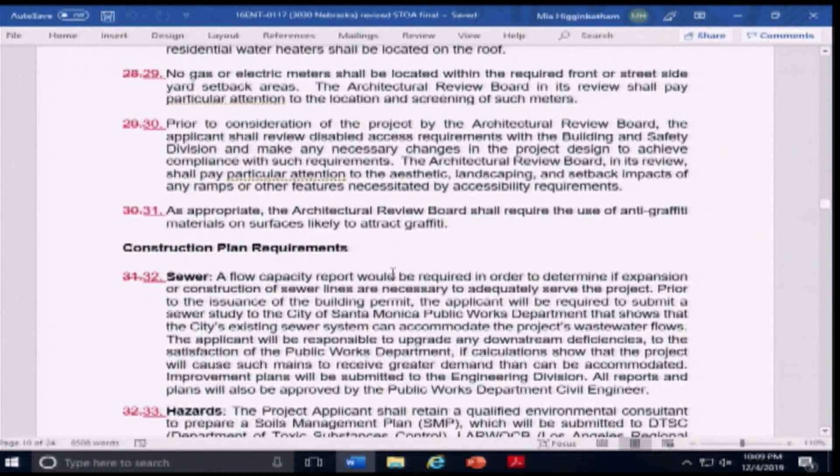as it relates to the construction management plan: applicant shall provide New Roads School with the name and contact information for the qualified environmental consultant or consultants hired to prepare the soils management plan, prior to its submission of the SMP to the reviewing agencies, and said consultant shall be present during grading and excavation in the known or suspected locations of contaminated soils. We'll make that edit.

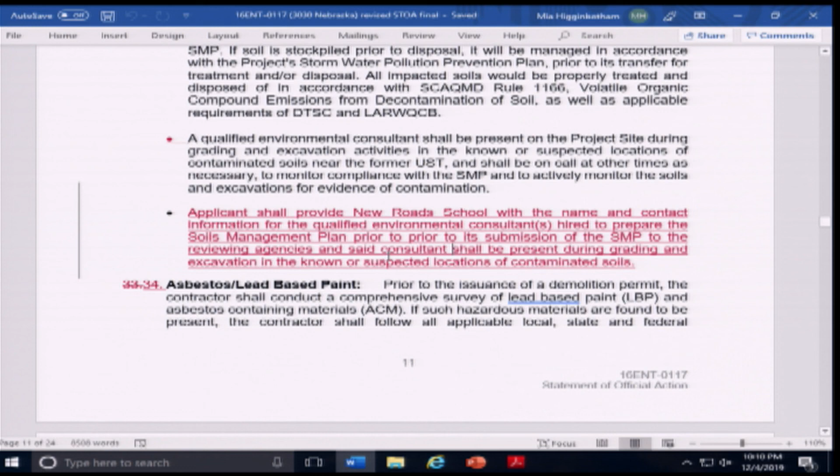I think we should strike that—we said 'prior to' twice, but I read it into the record correctly. It gives them the name and contact information, but it should probably also say something about the environmental consultant being given permission to speak to New Roads, because if we're writing a condition, it should.

Well, that's up to them. Yeah. Right. I like where you're heading with that. They engage with it—that's right. I understand the agreement to be engaging with that consultant and being able to offer.

Ms. Alexander said that they appreciated the offer to be informed and to speak with that consultant. That doesn't say that, so I just want to make sure we're consistent with what the agreement was.

Okay, and then wasn't there a 20-foot sound wall? Yes, are we getting into that? We're getting into that.

Condition number 40, I'll read the language in red. Before commencement of construction, the applicant shall, at its expense, install a sound attenuation barrier at least 20 feet in height from grade level, provided such barrier is permitted within the zoning ordinance, along the entire property line shared with New Roads School, unless the school notifies the applicant in writing that no such barrier is requested. Such barrier shall remain in place until all exterior construction work is completed, unless the school mutually agrees to temporary modifications for construction needs. During construction, applicant shall update the construction management plan to notify the city of changes to mutual agreements with the school with respect to the sound attenuation barrier.

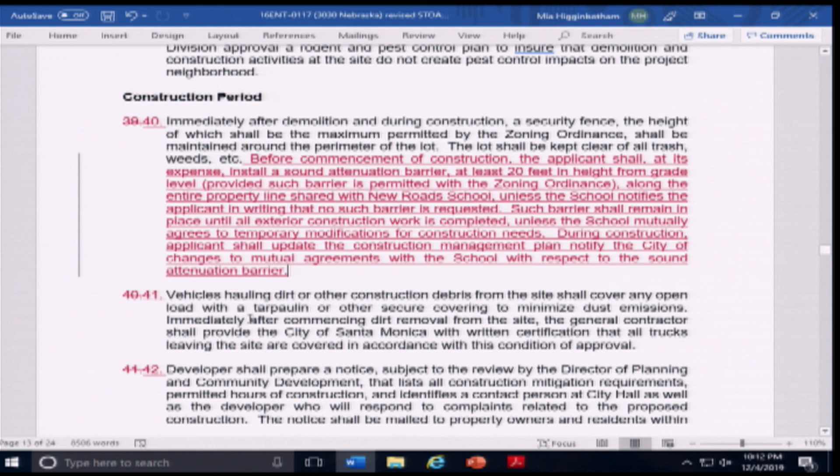Any others? Is that satisfactory to New Roads? Has that been worked out with them, okay. I believe that is the last of the—oh, there's one more? 91. Are you trying to speak?

Okay, and lastly, in red: at least 30 days before submitting its proposed construction period mitigation plan to the city, the applicant will provide a copy of its draft construction period mitigation plan to the head of school at New Roads School and solicit the school's input. The applicant shall provide written documentation of comments received from New Roads School and how comments have been addressed when the proposed construction period mitigation plan is submitted to the city. So that way the city has documentation that consultation occurred and what those comments are, compiled back to staff.

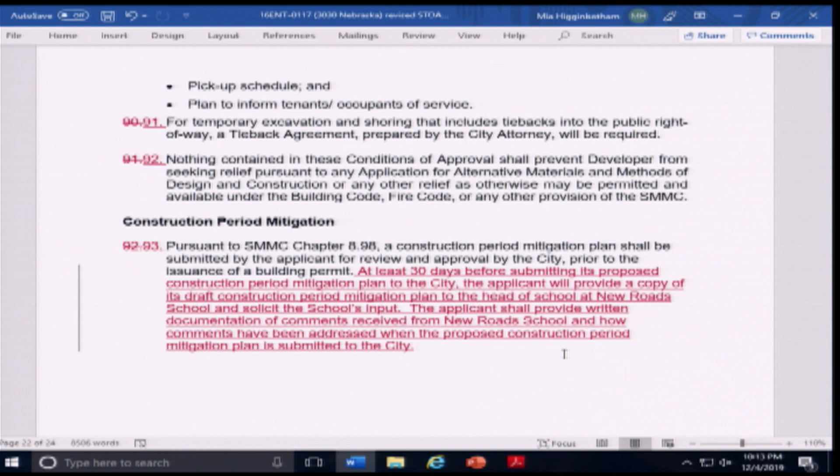Great. Could we add 'and solicit the school's input' to the soils one? Since it's just draft language that's available. Input to the soils, what? Well, it's name and contact information. Okay, yeah, I don't think we need that. No, that's good.

It's all good. Okay, so I was in the midst of trying to put in some friendly amendments, and most of them were just addressed. 9-foot tree wells is the only one you mentioned. Right, and then I got to the other ones, I started doing New Roads, and they just addressed all of those. The 10 units was just addressed, or the 10 restricted affordable.

Then I would personally like to see, by the time they get to ARB, that they design out those amenity spaces, and I don't know if there's an appetite for that from anybody. I sort of feel that it should be up to, if they are unit-specific or whatever, up to the person who's in the unit as to whether they want it for storage space or a place to go work away from people. I think it's friendly. All right, whatever, it is friendly. I think we're obsessed with control. Yeah, that's a shock.

And then there was the no-fence one you had in there too. So I think that's it.

I'm going to support the motion, but before we end this, and I'm sure other commissioners may want to say something. I think we have learned tonight about the shortcomings of the Bergamot plan in terms of Tier 1 and Tier 2. If we really want to encourage housing, having only a 0.2 difference in FAR between Tier 1 and Tier 2 is ridiculous. I'm also just totally appalled by the 395 parking spaces on a project that's within walking distance of the Expo line. That's just unbelievable. And I know it's code, but I really think we need to look at that. I don't know if we want to take away all minimums like we did downtown, or just reset the minimum so that it doesn't make us look like we've ignored the Expo line.